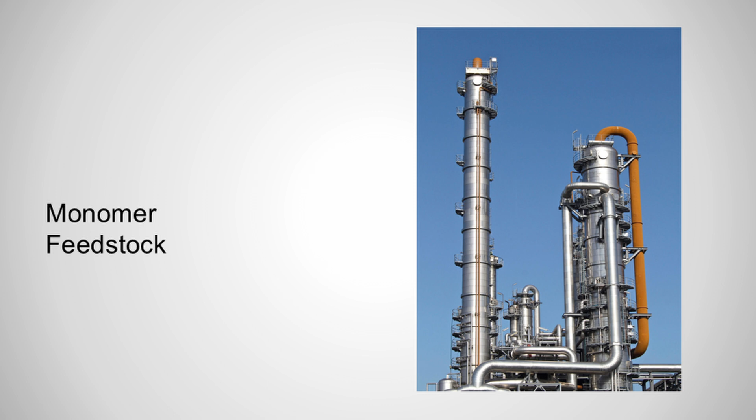Let's talk about its manufacturing process. Before any reaction begins, the primary ingredients, monomers, solvents, and chemical agents are measured and prepared. Monomer feedstock: the core ingredients are selected based on their desired latex properties. The standard latex involves styrene, a liquid, and butadiene, a gas liquefied under pressure.

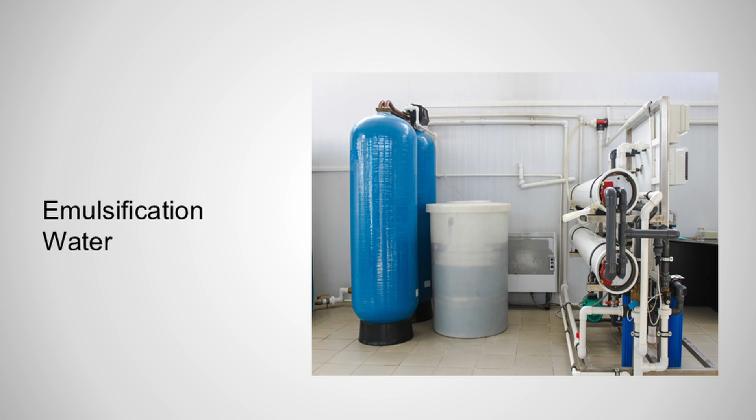Emulsification water: high purity demineralized water acts as the continuous medium that suspends the particles and dissipates the heat generated by reaction. Surfactants, or emulsifiers—soap or fatty acids—are added to lower surface tension, allowing the oil-soluble monomers to disperse uniformly into tiny droplets within the water.

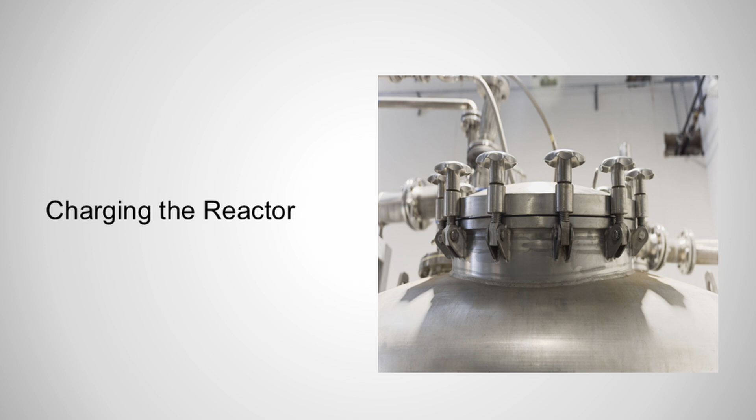Emulsion and reaction: this is where the actual synthesis occurs inside a heavy-duty agitated reactor vessel. Charging the reactor, the water, emulsifiers, monomers, and molecular weight regulators (modifiers) are pumped into the reactor and vigorously agitated to form a stable emulsion. Then comes catalyst initiator injection.

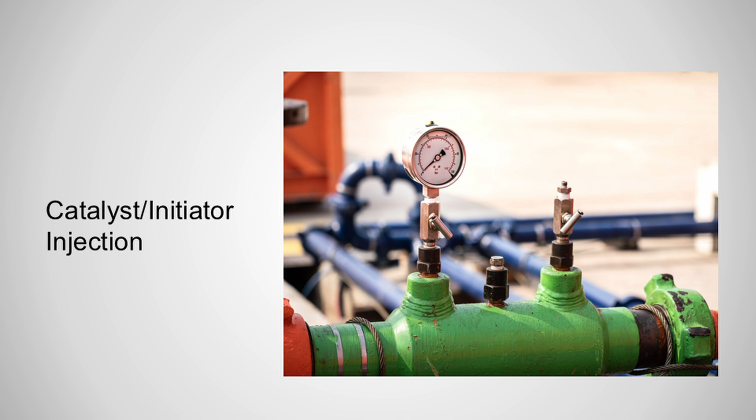A water-soluble free radical initiator such as potassium persulfate or hydrogen peroxide is injected to jumpstart the polymerization reaction. The initiator breaks down into free radicals, which migrate into the soap micelles swollen with monomers. The monomers chemically bond together, forming long-chain polymers. This reaction is highly exothermic and generates heat, so cooling jackets around the reactor strictly regulate the temperature, typically kept cold around 5 degrees Celsius for high quality rubber, or hot around 50 degrees Celsius depending on the grade.

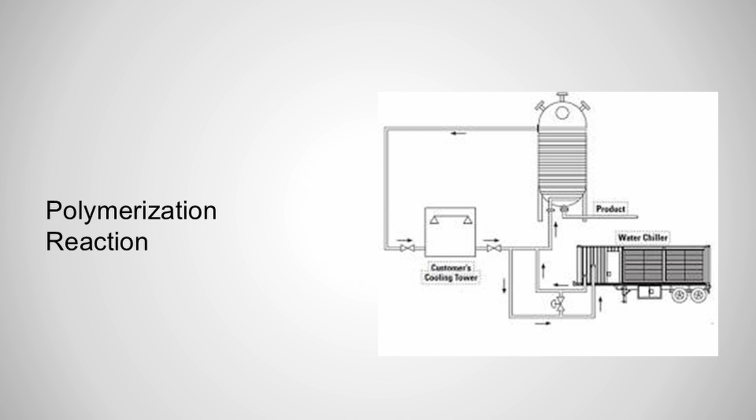Step 3: short stopping and separation. Stripping—the reaction must be halted before all monomers are consumed to prevent the polymer chains from becoming overly cross-linked and brittle. Short stopping: when the monomer to polymer conversion reaches a specific target, usually 60% to 70%, a short stop chemical like hydroquinone is injected to kill the free radicals and terminate polymerization.

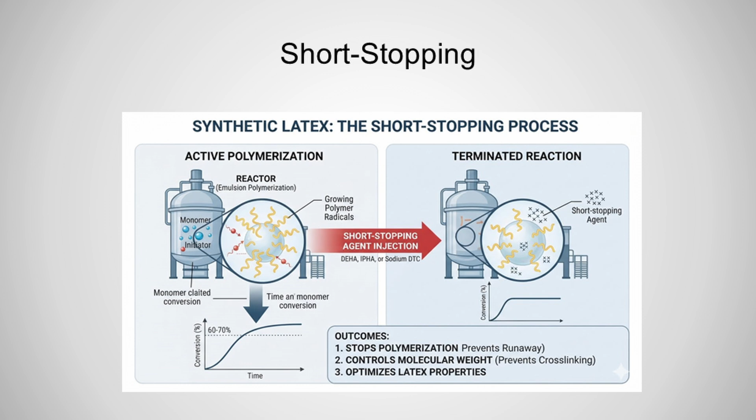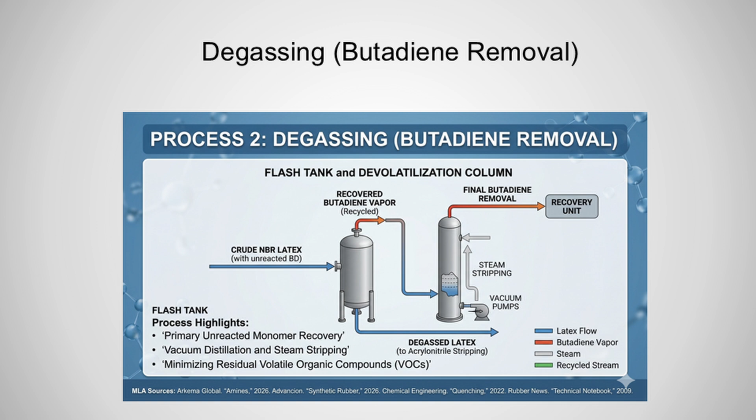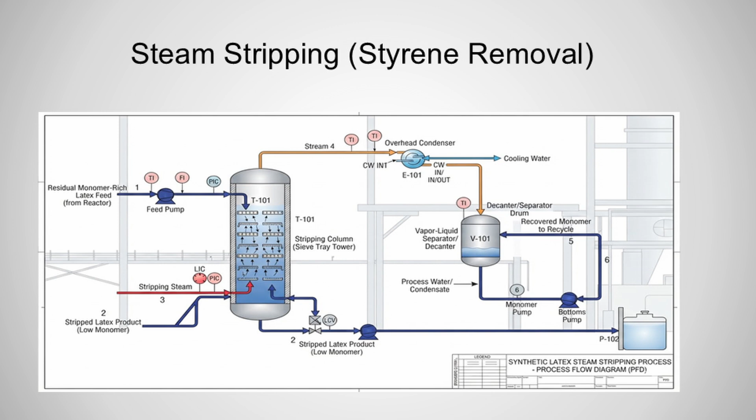Degassing, butadiene removal: the unreacted, highly volatile butadiene gas is flashed off under reduced pressure and captured for recycling. Steam stripping, styrene removal: the mixture is sent to a stripping column where steam is injected. The steam vaporizes the remaining unreacted styrene monomer, separating it from the latex so it can be condensed and reused.

Step 4: conditioning and compounding, the fabricating stage. The raw polymer base is modified to meet specific commercial shelf life and performance standards. Stabilization: antioxidants and stabilizers are blended into the liquid latex to prevent atmospheric oxygen, UV light, and heat from degrading the polymer chains over time.

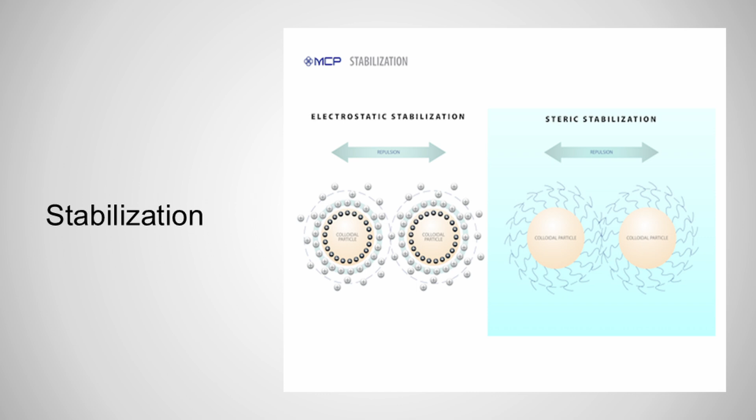pH adjustment: ammonia or other alkaline chemicals are added to adjust the pH, ensuring the liquid emulsion remains stable and does not prematurely coagulate during transit or storage.

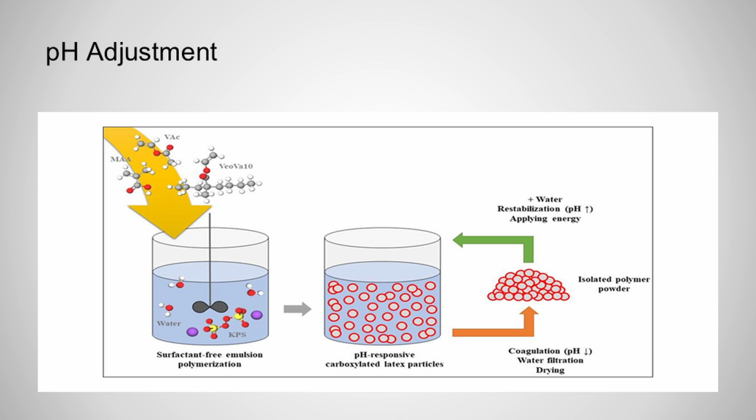The picture details mechanisms of pH switchable stabilization and coagulation, specifically for synthetic carboxylated latex systems.

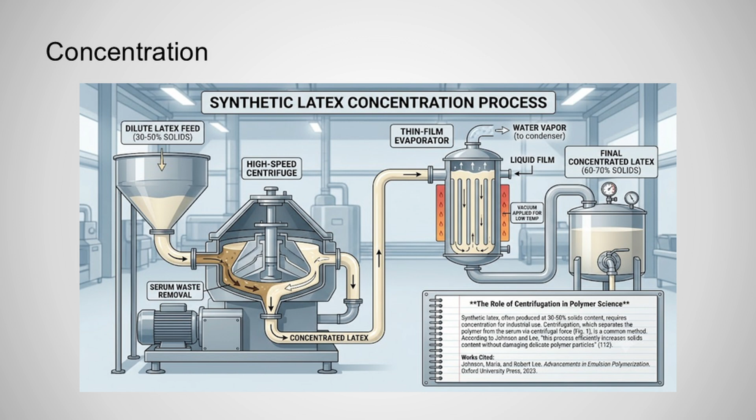Concentration: if a higher solids content is required, the latex is concentrated using methods like evaporation or centrifugation to remove excess water. Finally, finishing and quality control.

The final steps ensure the synthetic latex is uniform and ready for industrial application. Blending and filtration: multiple batches are often blended in large storage tanks to ensure product uniformity. The liquid is then passed through fine mesh filters to remove any macrocoagulum or grit.

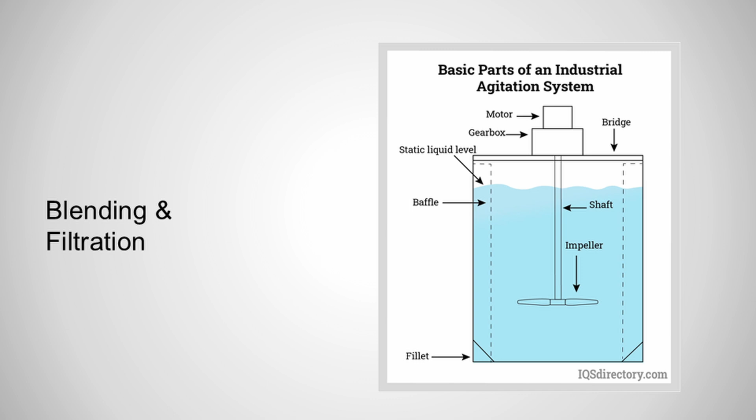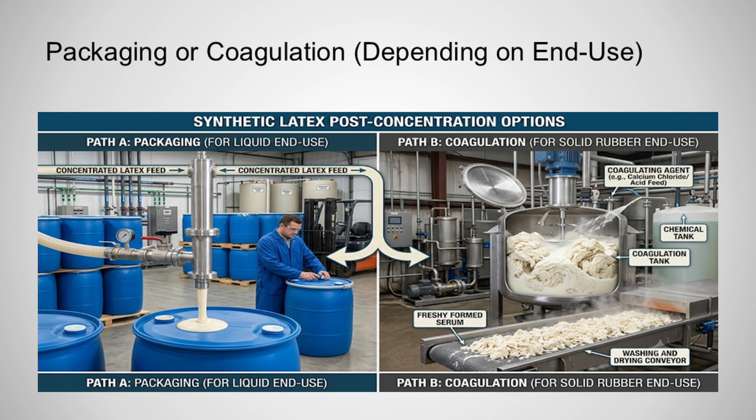Packaging or coagulation: for liquid latex applications, like adhesives, carpet backing, and dip goods, the liquid emulsion is pumped directly into tanks, drums, or totes. For solid synthetic rubber, the latex is deliberately coagulated using acids or salts, washed to remove residual chemicals, dried, and pressed into bales of solid rubber.

Let's talk about the products. Textiles and floor coverings, carpet backing: this is actually the single largest market for styrene butadiene latex. It is used as a heavy structural adhesive that locks the carpet tufts into backing fabrics, keeping the carpet flat and durable. Artificial turf: much like carpet, the synthetic grass blades are secured to the base layers using a thick coating of weather-resistant synthetic latex.

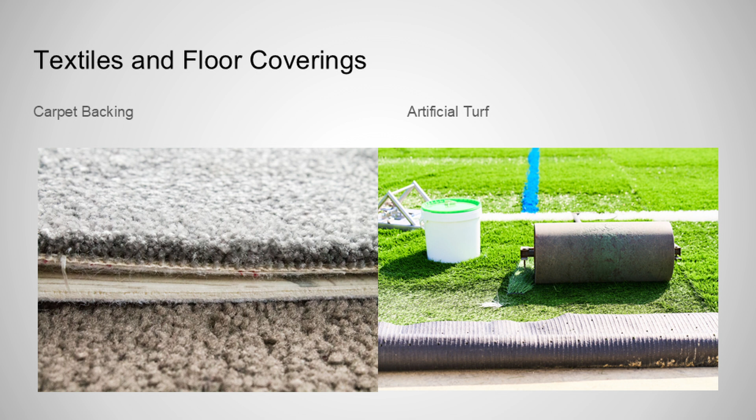Dip goods and medical supplies: nitrile gloves. Medical and industrial latex-free gloves are made from acrylonitrile butadiene latex, nitrile rubber.

They offer excellent puncture resistance and protection against oils and acids. It also works for coated work gloves. Knit safety gloves are frequently dipped in synthetic latex to provide a grippy, durable, and puncture-resistant coating on the palms and fingertips.

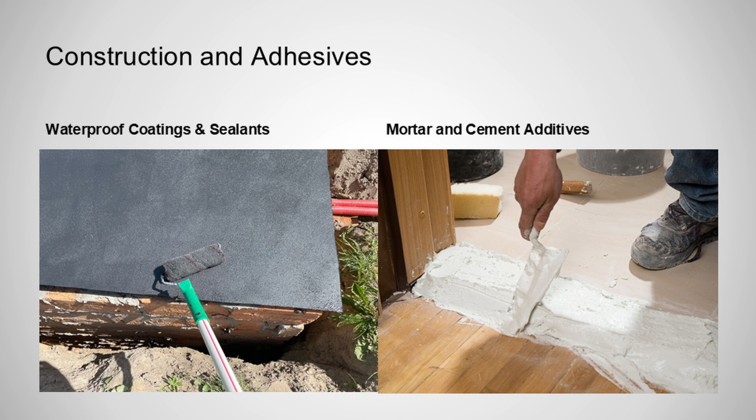Construction and adhesives: waterproof coating and sealants. Synthetic latex is a primary ingredient in concrete sealers, roof coating, and waterproof membranes because it blocks water while remaining flexible enough not to crack when buildings shift. Mortar and cement additives: adding liquid latex to cement mixes increases their adhesive strength, flexural strength, and water resistance, often called latex modified concrete.

Consumer goods and comfort: synthetic foam mattresses and pillows. Many latex foam mattresses use a blend of natural and synthetic SBR latex. It is whipped into a foam and baked, providing a highly responsive, breathable, and supportive sleep surface. Shoe soles: many casual shoes and sneakers use dense molded synthetic rubber derived from coagulated latex to provide flexible, long-lasting grip.

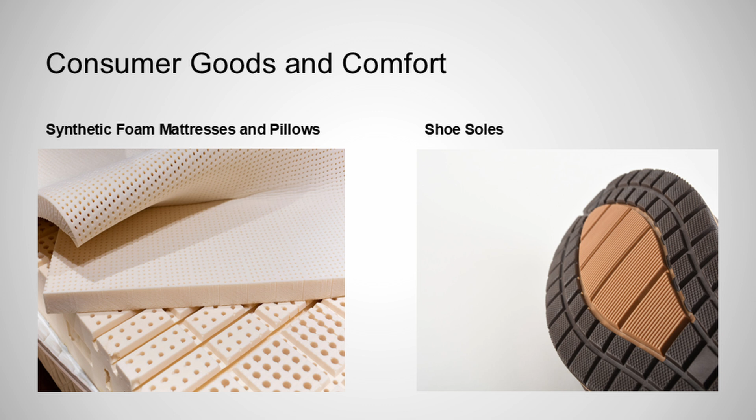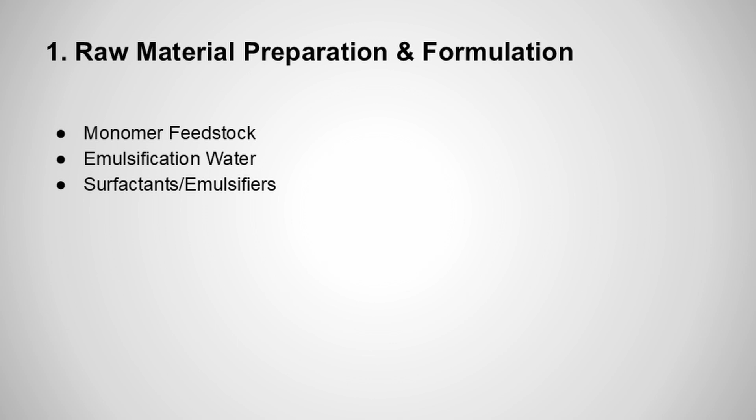In conclusion: before production starts, base chemical ingredients called monomers, like styrene and butadiene, are chosen for the recipe. These oil-based chemicals are mixed into pure water, which acts as a liquid base and keeps the mixture cool. Finally, the chemical soap surfactants are added to lower surface tension, allowing the oil-based ingredients and water to blend smoothly into an even mix of tiny droplets. Inside a heavy-duty reactive vessel, the water, monomers, emulsifiers, and modifiers are vigorously mixed to form a stable emulsion.

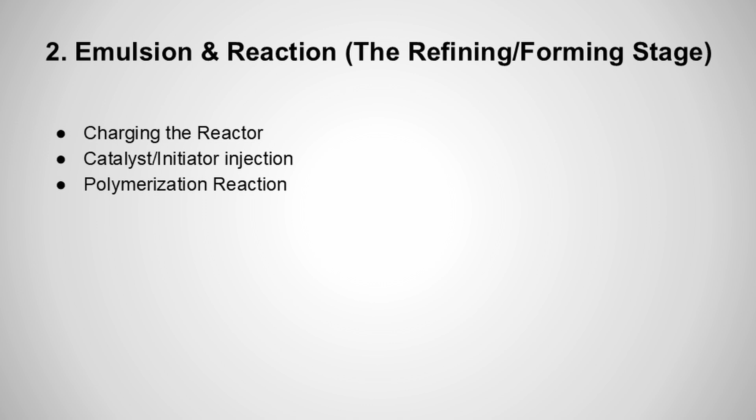A water-soluble initiator, like hydrogen peroxide, is then injected to jumpstart the polymerization process, causing the monomers to chemically bond into long-chain polymers. Because the chemical reaction generates intense heat, a cooling jacket wraps around the reactor to strictly regulate the temperature, keeping it cold at around 5 degrees Celsius or hot at 50 degrees Celsius depending on the grade of the rubber being made.

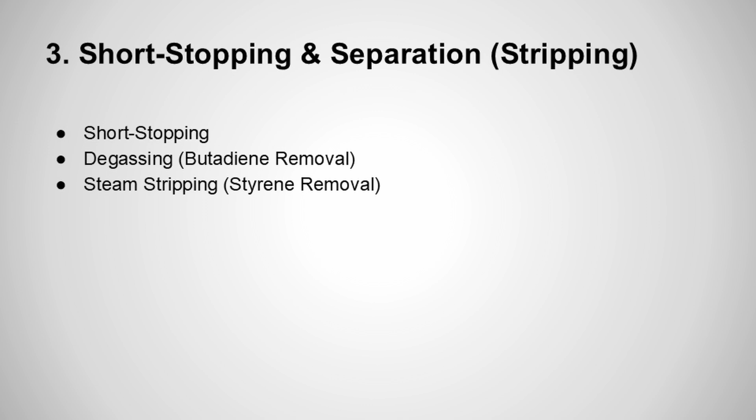To prevent the polymer chain from becoming brittle, the reaction is intentionally halted before all the ingredients are used up. Once the mixture hits a target conversion rate of 60 to 80%, a short-stop chemical is injected to kill the reaction. The remaining unreacted materials are then separated and recycled. Volatile butadiene gas is removed by depressurizing degassing, while unreacted styrene is vaporized and stripped out using steam, leaving behind clean latex.

The raw polymer base is modified to meet commercial standards and extend its shelf life. Antioxidants and stabilizers are blended into liquid latex to protect the polymer chains from degrading due to oxygen, UV light, or heat. Ammonia or alkaline chemicals are then added to adjust the pH, keeping the liquid emulsion stable during storage.

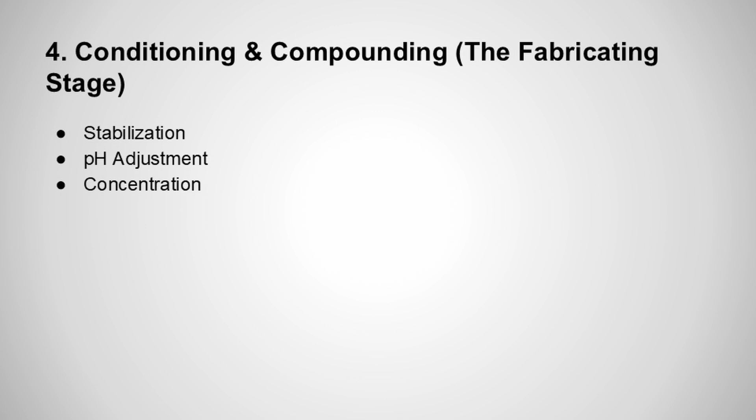Finally, if the application requires thicker products, excess water is removed using evaporation or centrifugation to concentrate the latex. To ensure product uniformity, multiple batches of synthetic latex are blended together in large storage tanks and passed through fine mesh filters to remove any microcoagulation or grit.

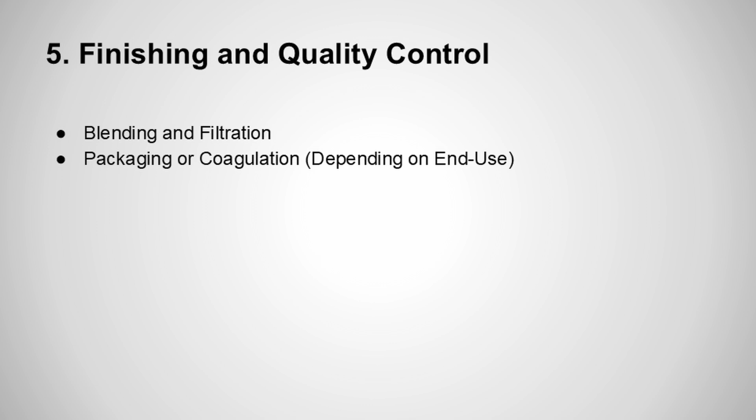Depending on its intended end use, the finished product is then processed in one of two ways: it's either packaged directly into tanker drums or totes for liquid applications, or it's deliberately coagulated with acid or salts, washed, dried, and pressed into bales for solid synthetic rubber applications. And finally, its properties can be customized for optimal water resistance, durability, and adhesion.

Its function as the critical backing binder for commercial carpets and artificial turfs, as well as the puncture-resistant protective layer of medical gloves and coated work gear. Furthermore, its flexibility makes it a key additive for waterproofing structural sealants, sticky tape adhesives, and reinforced concrete mortar, while its mechanical resilience provides the supportive cushioning found in synthetic foam mattresses and molded shoe soles.

The paper and packaging industry heavily relies on synthetic latex as its pigment binder to create a smooth, high-gloss finish required to prevent ink bleeding on premium magazine pages and cardboard packaging.